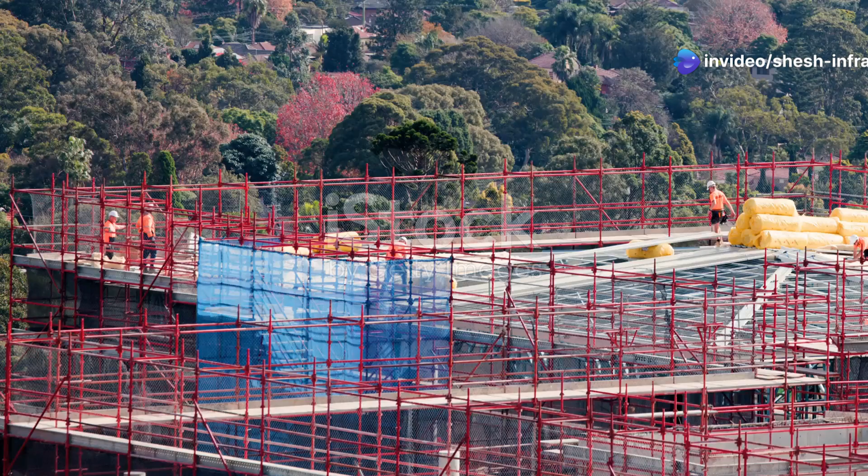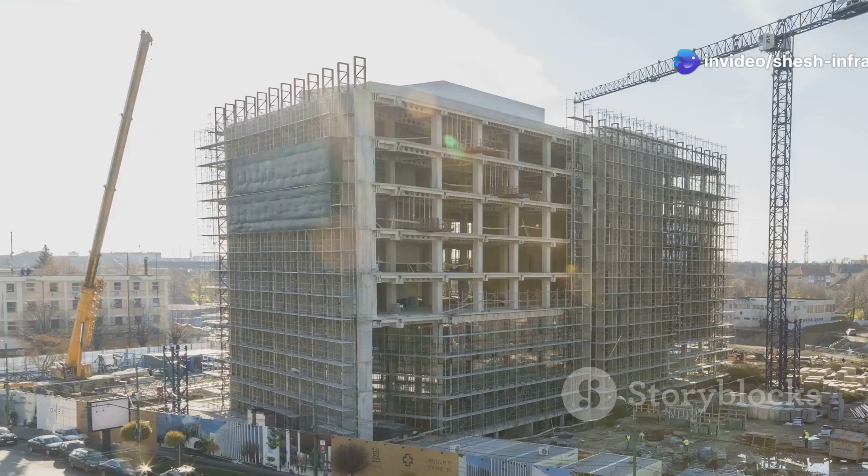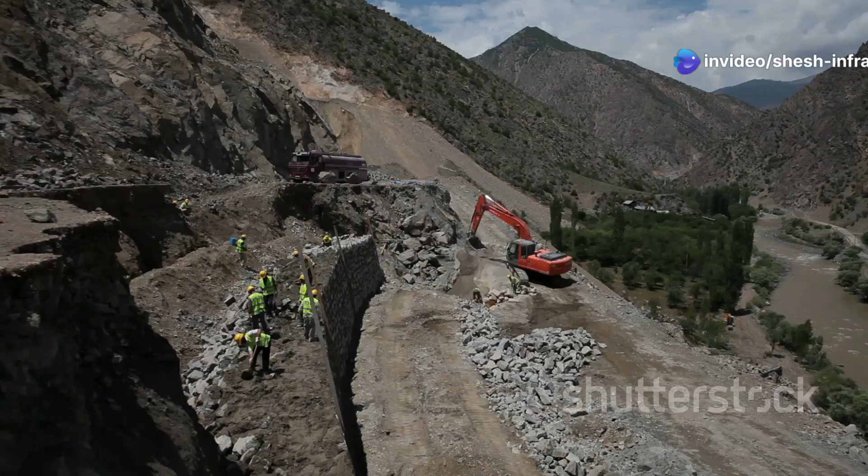Today I'm sharing powerful construction secrets that no one tells you, backed by 50 years of ground reality and wisdom. For half a century, I've walked these grounds, seen structures rise from mere blueprints to towering realities. I've witnessed the evolution of this very Baddi, from its nascent stages to the bustling industrial hub it is today. This isn't just about theory learned from books. This is knowledge forged in the heat, dust, and relentless challenges of actual construction sites, right here in our unique

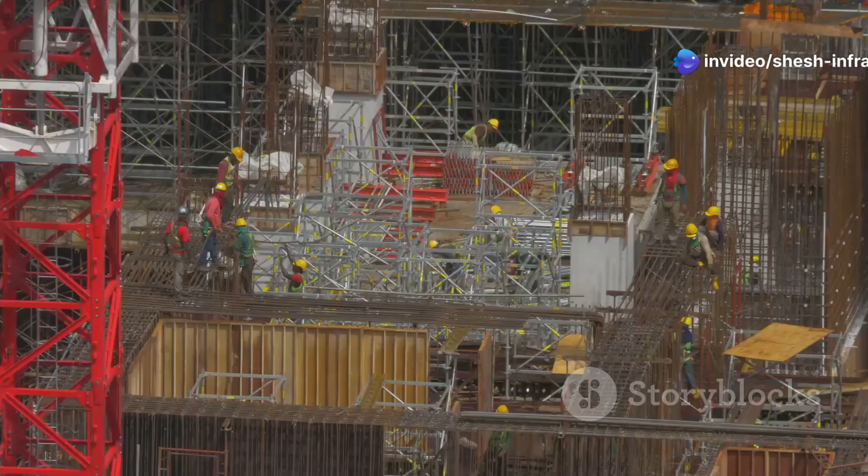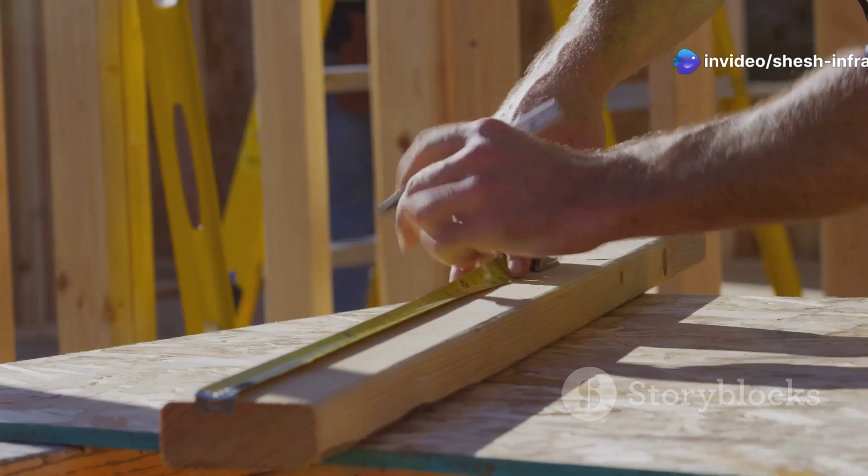Himalayan terrain. These aren't secrets hidden in complex engineering manuals or taught in fancy seminars. These are the truths learned through experience, through mistakes made and rectified, through countless hours spent ensuring every brick, every beam, every foundation is laid with precision and foresight. I'm talking about the kind of practical wisdom that can save you lakhs, prevent disastrous errors, and ultimately help you build structures that don't just stand, but stand the test of time.

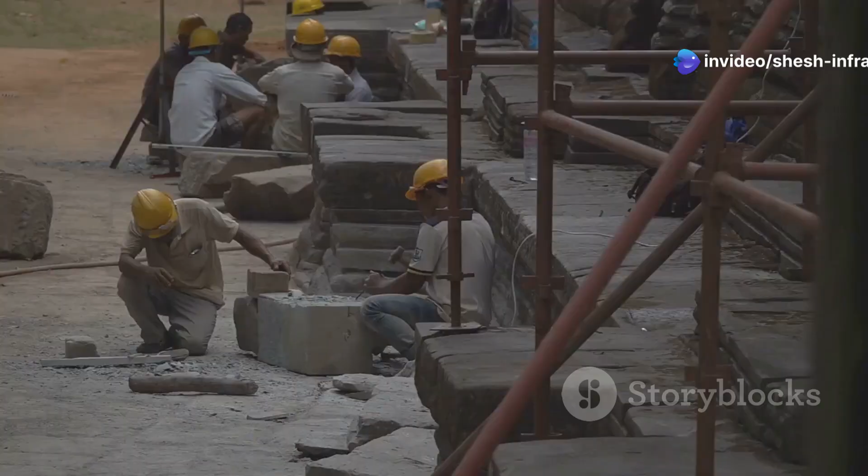Many people enter this field looking for quick profits, but construction, dosto, is a marathon, not a sprint. It demands patience, diligence, and an unwavering commitment to quality. Principles I've held dear for 5 decades. So grab your notepads or just lend me your ears, because in this video, I'm going to pull back the curtain on what truly makes a construction project successful.

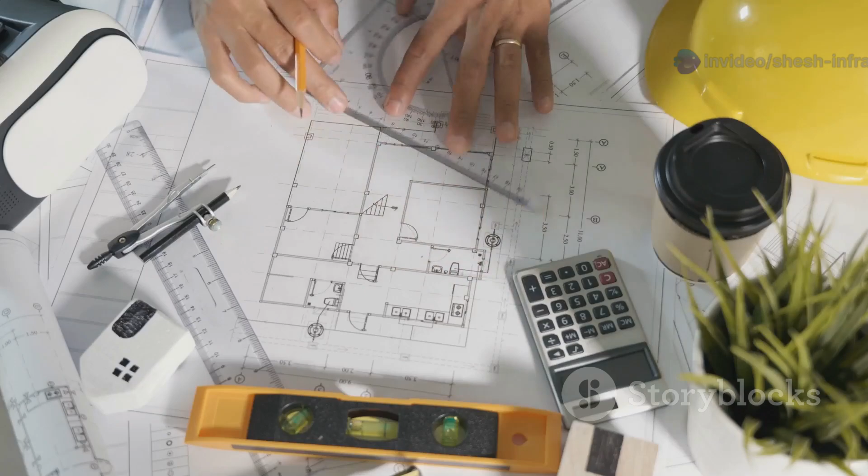We'll delve into the mindset required, the common pitfalls to avoid, and the enduring lessons that have guided me and my company, Shesh Infrastructure, through thick and thin. This is more than just a tutorial. It's a heartfelt sharing of a lifetime's work, designed to empower you, whether you're a budding contractor, an aspiring engineer, or someone simply curious about the world of civil construction. Let's build a stronger foundation of knowledge together.

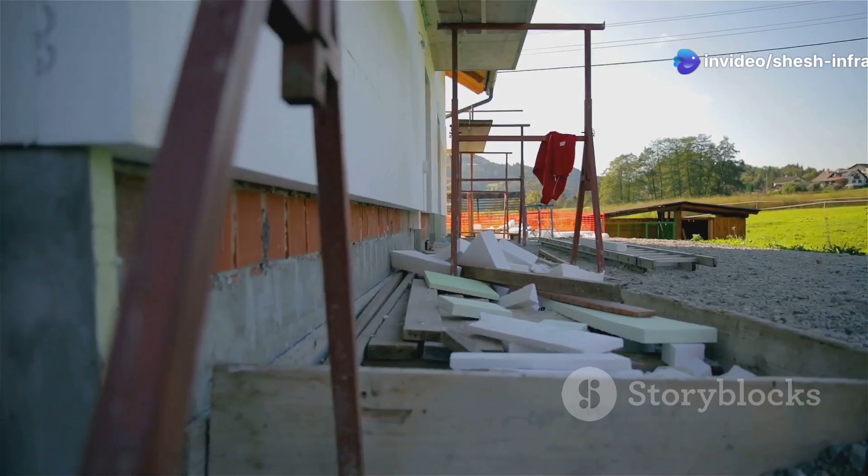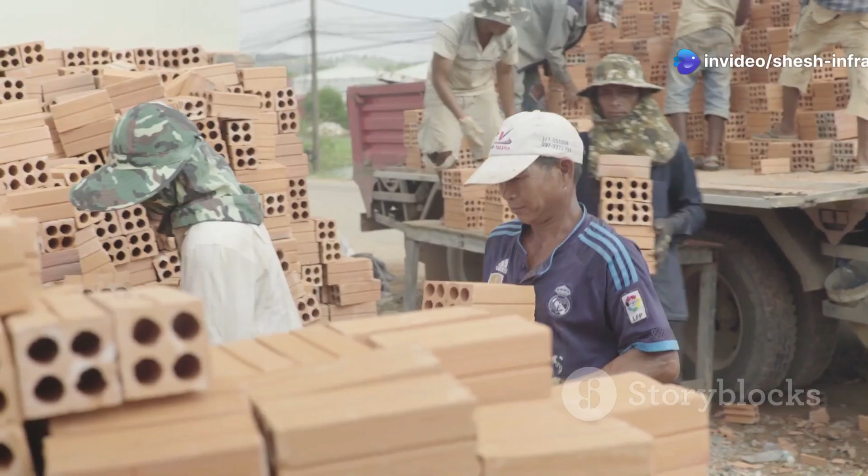Friends, when we talk about construction, what's the first thing that comes to mind? For many, it's bricks, cement, steel, machinery, the tangible elements. And yes, these are undeniably crucial components, the building blocks of any physical structure. But I'm here to tell you, after 50 years in this field, that true construction, the kind that endures and inspires, goes far beyond these materials. It begins much earlier, in a place you can't touch or see. It begins with a thought, an idea, a vision.

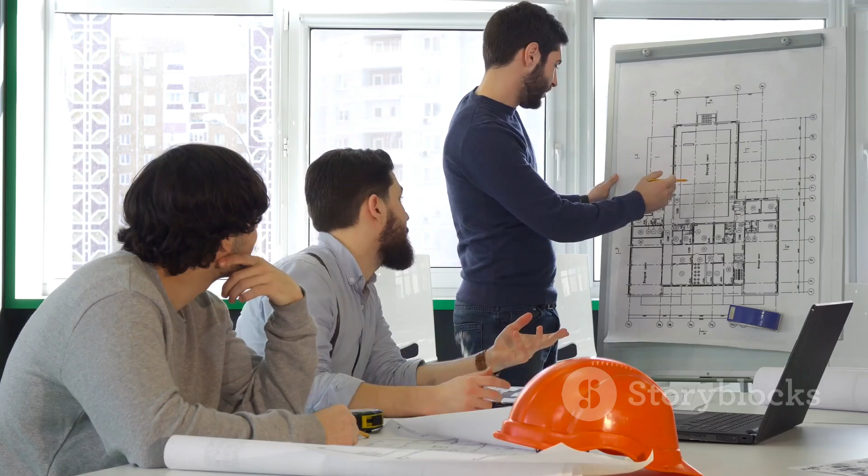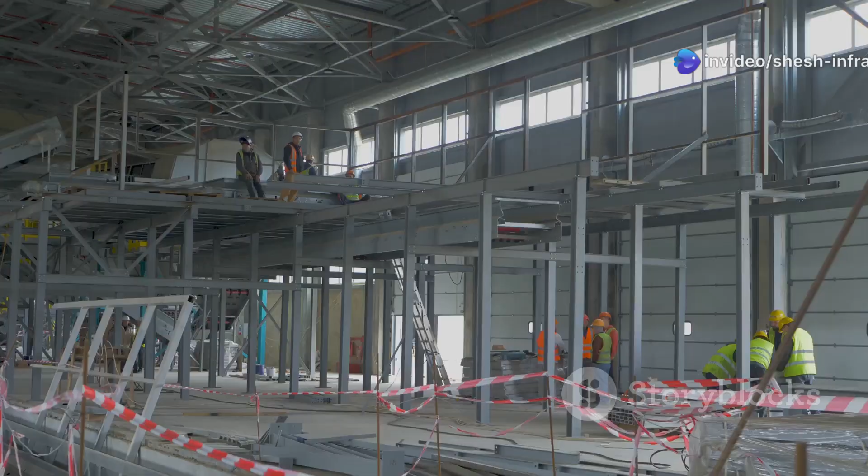This isn't just a catchy phrase, it's the fundamental truth of our profession, a principle that separates mere builders from true creators of lasting infrastructure. This vision is the soul of the project. It's the architect's dream, the client's aspiration, the community's need. It's the understanding of purpose. What will this building be used for? Who will it serve? How will it interact with its environment and the people within it?

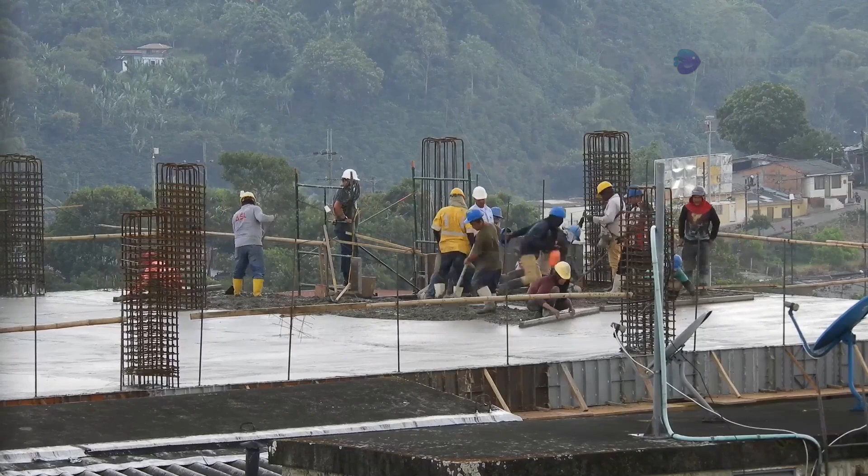Before a single spade hits the ground, this vision must be crystal clear, not just to the person who conceived it, but to every single individual involved in bringing it to life, especially the contractor. Without this clarity, a building is just an assembly of materials, lacking spirit, lacking direction, and often lacking in ultimate functionality and satisfaction for those who will use it.

The contractor's primary role, therefore, isn't just to execute a set of drawings. It's to first deeply understand, internalize, and then meticulously translate that vision into a 3-dimensional reality. This requires more than technical skill. It requires empathy, communication, and a genuine commitment to the project's ultimate goals. You must ask questions, probe deeper than the blueprints, and ensure that your interpretation aligns perfectly with the intended outcome.

Many a project has gone astray not due to a lack of technical expertise, but due to a fundamental misunderstanding or neglect of the initial vision, leading to costly rework, delays, and a final product that falls short of expectations.

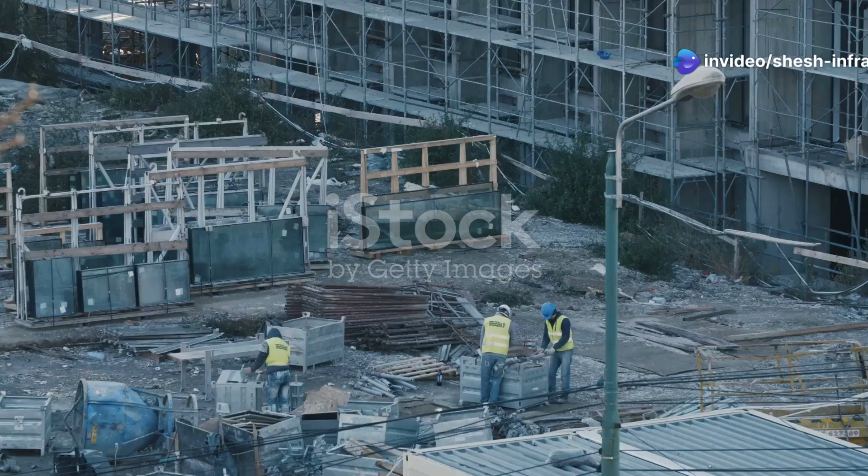Now, let's talk about something equally critical, the mistakes. In my 50 years, I've seen contractors, both new and experienced, fall into traps that not only cost them dearly in terms of money and reputation, but also compromise the safety and longevity of the structures they build. These aren't always due to a lack of skill, but often stem from oversight, haste, or a misunderstanding of fundamental principles. Knowing these pitfalls is the first step to avoiding them. And believe me, prevention is always better and cheaper than cure in our line of work.

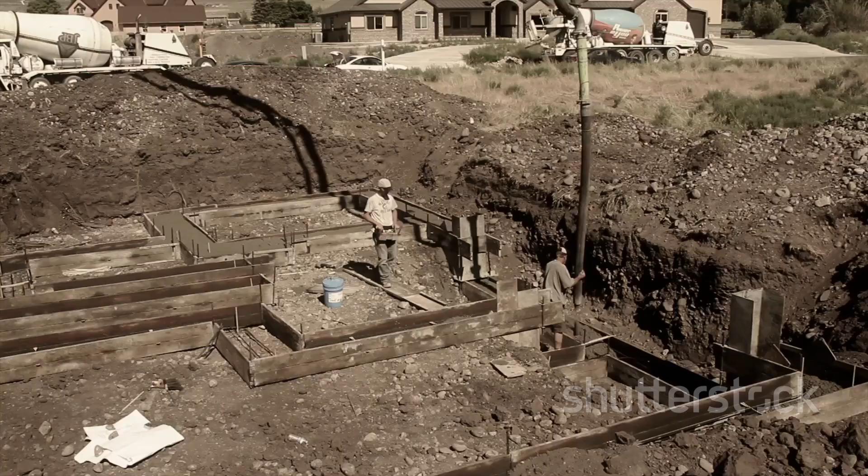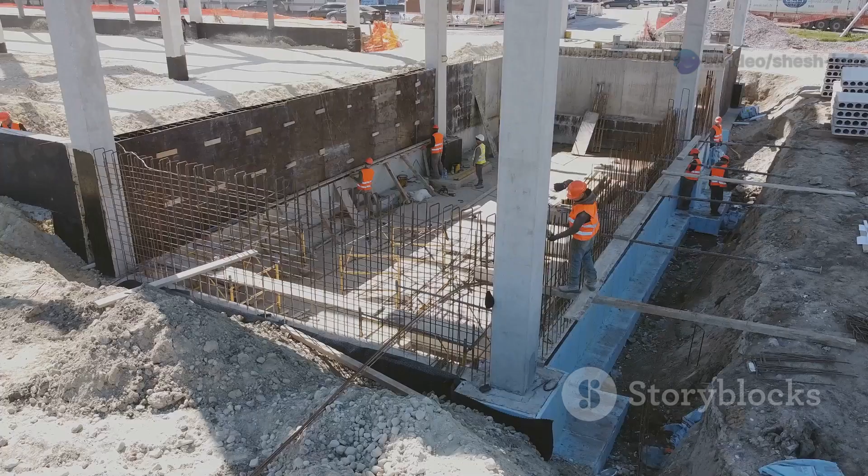Let's look at some of the most common and damaging blunders. One of the most grievous errors I witness time and again is rushing the foundation work. Doston, the foundation is quite literally the base upon which everything else stands. It's the anchor of your building, its connection to the earth. Trying to save a few days or a little money here is the definition of false economy.

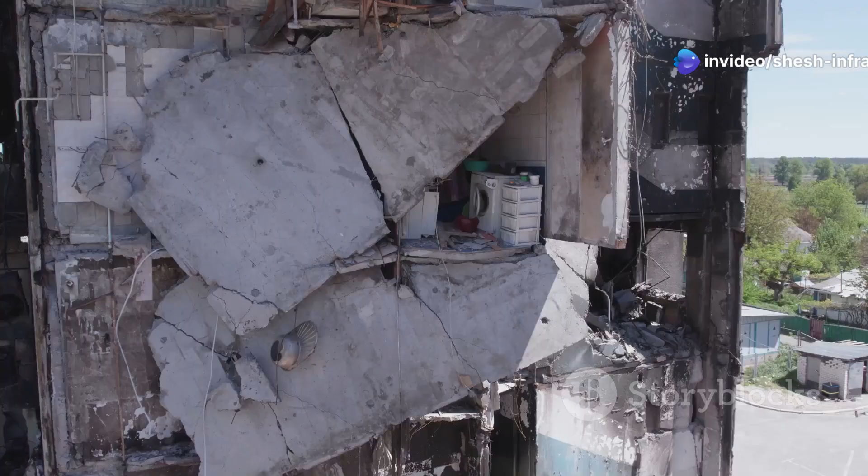A compromised foundation can lead to a cascade of problems later: cracks in walls, uneven settling, structural instability, issues that are incredibly difficult and expensive to rectify once the superstructure is up. I've seen buildings condemned because of foundation failures that could have been easily prevented with a bit more diligence at the start.

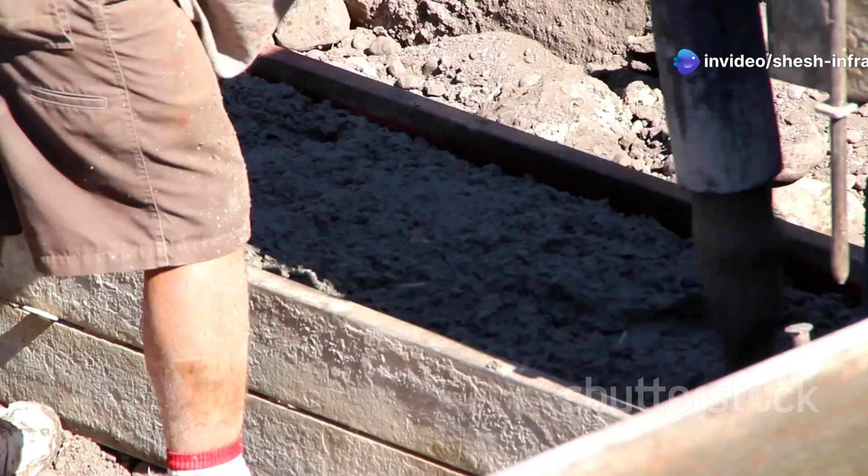To avoid this, meticulous attention to soil testing, proper excavation to the design depth, careful reinforcement as per structural drawings, and using the correct grade of concrete with adequate curing are non-negotiable. Here in Badi, with our varied terrain, understanding the soil conditions is paramount. Don't just rely on assumptions. Get proper geotechnical reports. Double-check the centering and shuttering before pouring concrete.

Ensure proper compaction, and most importantly, allow for adequate curing time. Rushing this critical phase is like building a palace on sand. It's a disaster waiting to happen, and no amount of good work above ground can compensate for a weak start.

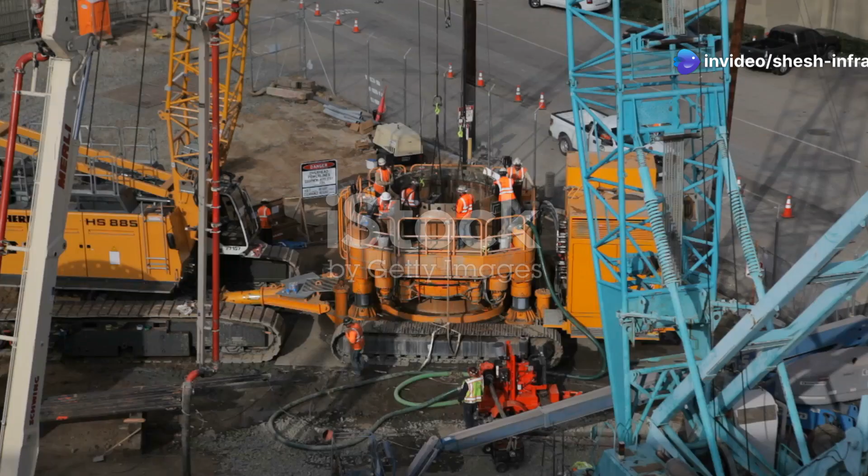Chapter 3. Wisdom Forged in Steel and Concrete. My 50-year journey. 50 years on construction sites. That's a lifetime of learning, of observing, of refining processes. The lessons I've gathered weren't learned in a classroom. They were forged in the heat of the sun, the bite of the cold, amidst the noise of machinery and the sweat of hard labor.

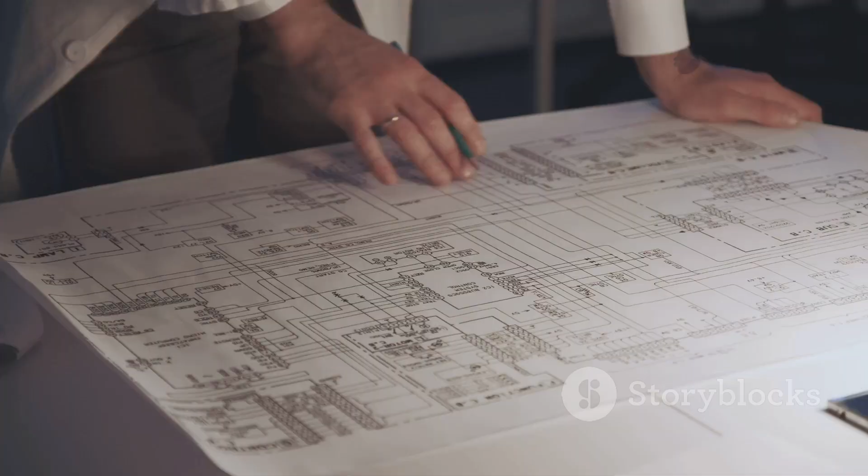These are the principles that have not only ensured the success of Shesh Infrastructure's projects, but have also become the bedrock of our reputation. Today, I want to share 3 such lessons that I believe are absolutely fundamental for anyone serious about building a lasting legacy in construction. These are simple, yet profoundly impactful. The first, and perhaps one I repeat most often to my team, is always double-check the drawings. It sounds so basic, doesn't it?

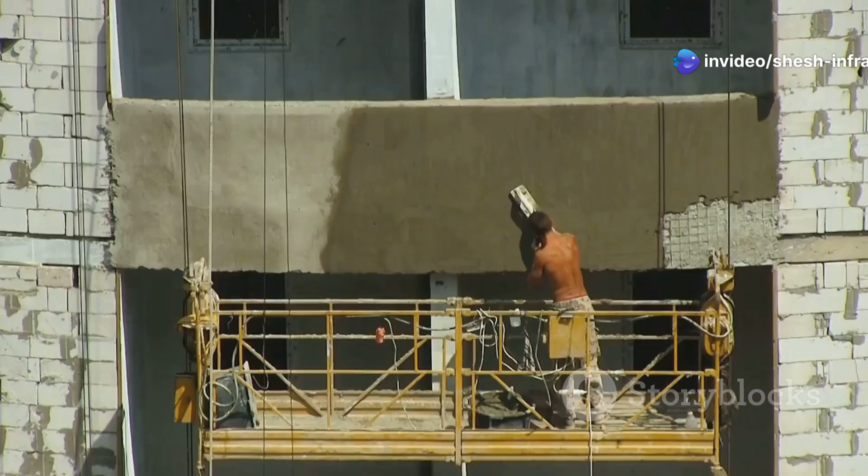Yet you would be astounded at how many costly errors arise from misinterpreting a blueprint or simply assuming something is correct without verification. A tiny discrepancy on paper can translate into a massive, expensive problem on site. Dimensions, levels, material specifications, reinforcement details. Every single element must be scrutinized by multiple eyes before execution begins. Never assume the drawing is perfect, and never assume your initial understanding is flawless.

Question, clarify, confirm. This means fostering a culture of diligence where site engineers, supervisors, and even skilled foremen are encouraged to review drawings critically. It means holding regular coordination meetings between the architectural, structural, and service consultants to iron out any clashes or ambiguities before they manifest as physical errors.

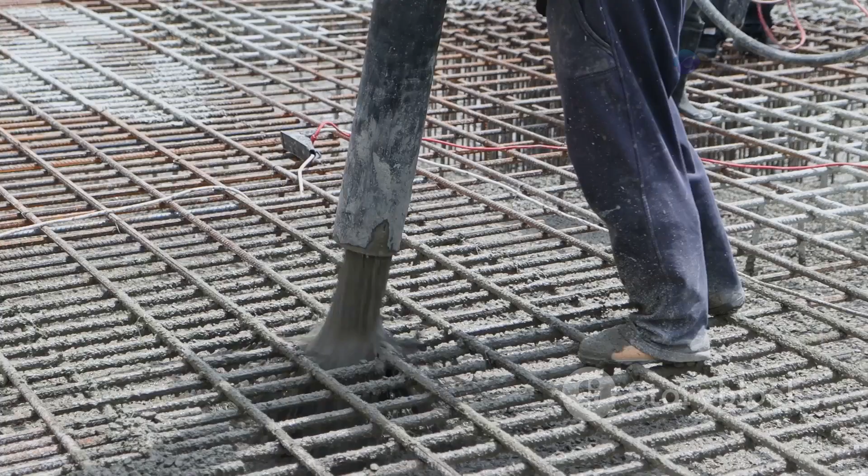A few extra hours spent in careful checking at the office or in the site cabin can save weeks of rework and lakhs of rupees down the line. Remember, the cost of rectifying a mistake in concrete or steel is exponentially higher than correcting a line on a drawing. This vigilance is a hallmark of a professional contractor. The second lesson is one that goes to the very heart of structural integrity. Never ever compromise on the quality of steel and the process of curing concrete.

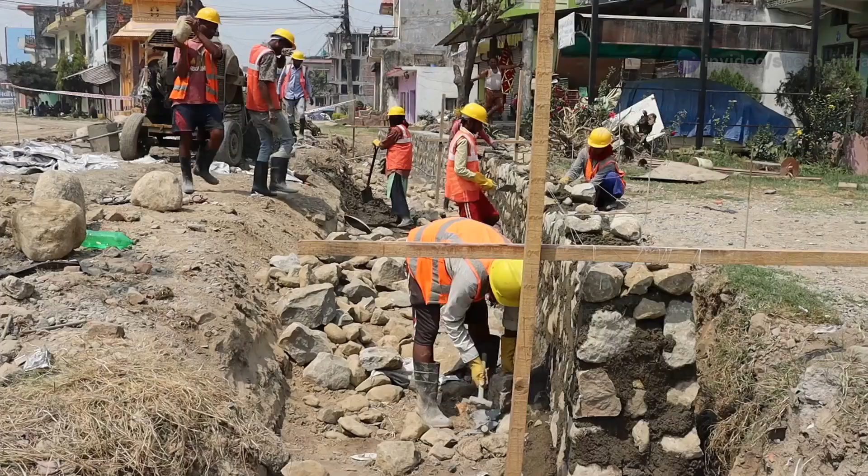This journey of 50 years has taught me that awareness, that jagrukta, is the most critical tool a contractor can possess. It's about being aware of the vision, aware of the potential pitfalls, aware of the materials, aware of your team, and aware of your immense responsibility. It's this conscious approach that transforms a mere construction project into a testament of quality and integrity.

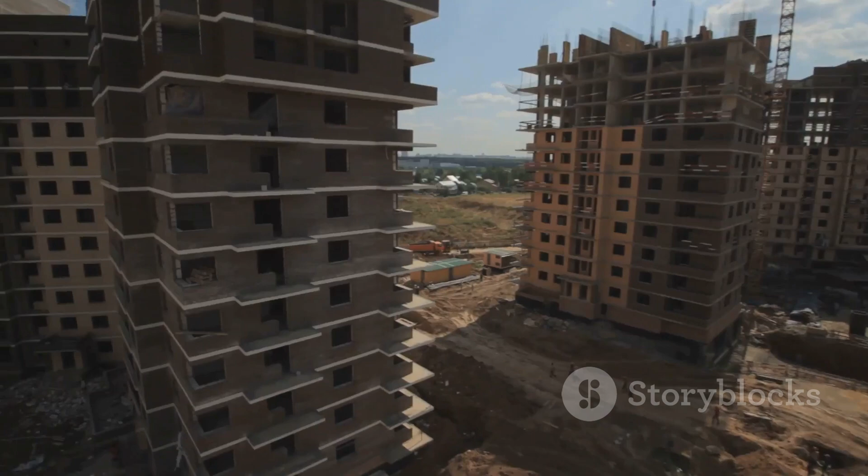This isn't just about building faster or cheaper. It's about building better, building smarter, and building with a conscience. The future of construction, especially in a developing nation like ours, hinges on this shift in mindset. We are not just erecting structures, we are shaping communities, enabling progress, and creating the physical fabric of our society.

Every decision we make, every action we take on site, contributes to this larger narrative. Let us all strive to be contractors who are not just skilled, but also deeply aware and responsible for the impact of our work.